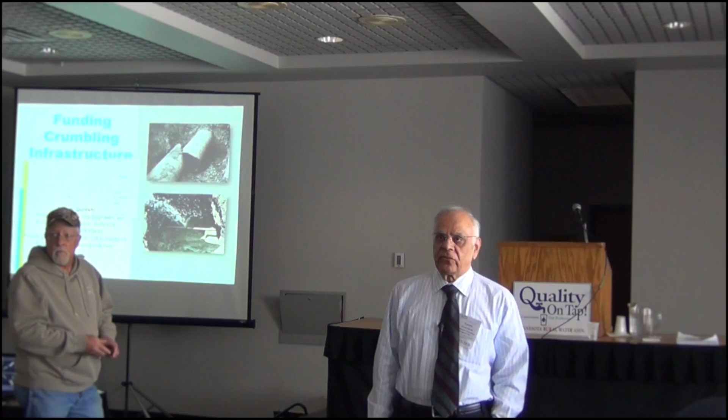Good morning. While I was driving up here, I was thinking about when I was a little boy and I would get a dollar from the tooth fairy every time I lost a tooth. A dollar? And if there was a hair fairy, I would now be a millionaire.

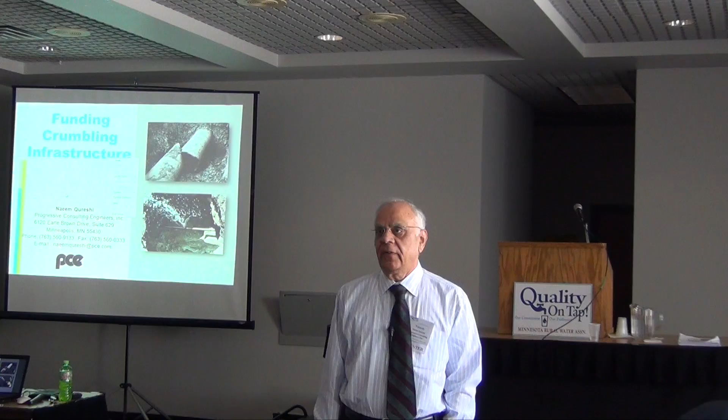The point I want to make is that as things age, they deteriorate. And as they deteriorate, we have to plan for its eventual replacement or repairs. My presentation today is going to focus on...

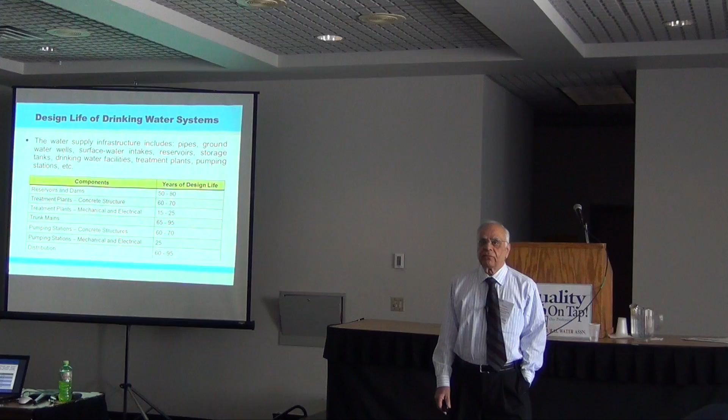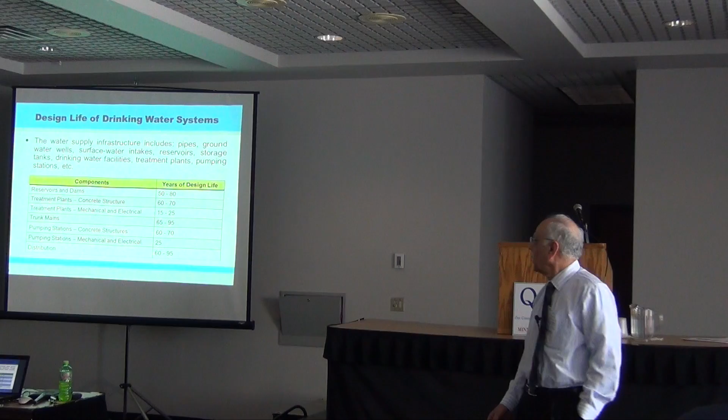First of all, design life of the various components of your water system are highlighted here. You have treatment plants, they're probably going to last about 60 to 70 years. Trunk mains, another 65 to 95 years, depending on the soil type. In some cases, if you have aggressive soils, that could be 65 years. If you have good soil, like sand, it could be a lot more. Pumping stations, if you have concrete structures, they last about 70 years. And the distribution system is 60 to 95 years.

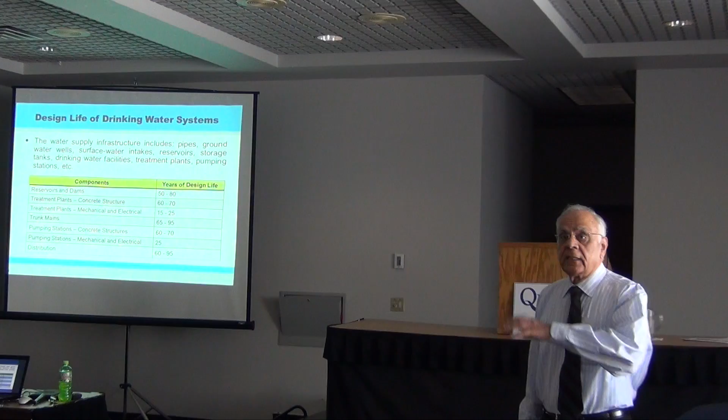So when you are looking at how much money you need, you have to keep in mind that you have to be able to fund these improvements as you go along.

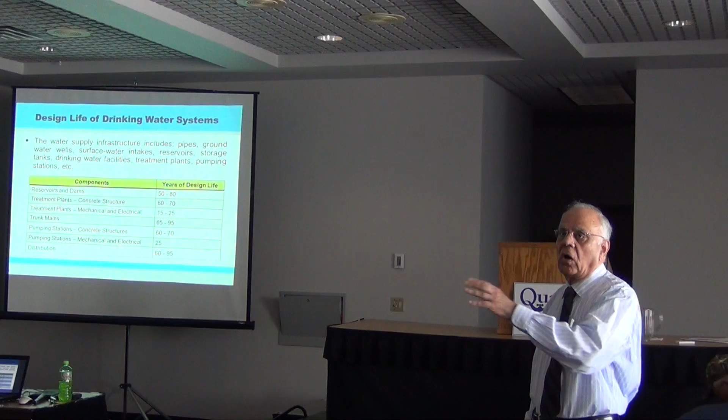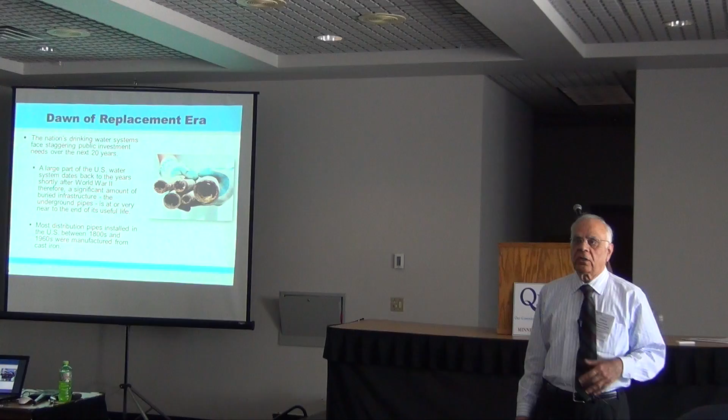Most of the drinking water infrastructure was constructed after World War II. This is a sample of some of the mains that have been dug up from various places. Most of your distribution system was actually constructed at the turn of the century, and the major installation occurred just after World War II, when a lot of our troops came back and started families, and expansion happened. There were hundreds and hundreds of miles of pipe laid for new housing.

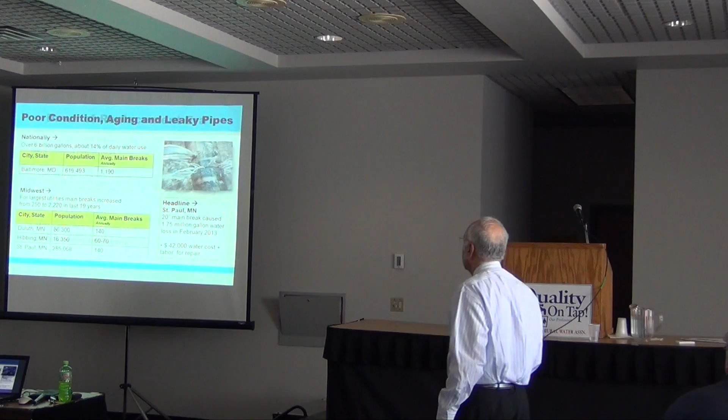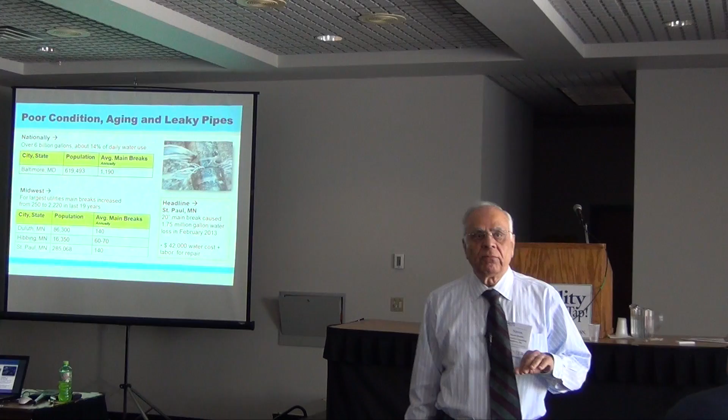What is the condition of our infrastructure? Nationally, I'll share some statistics with you. In Baltimore, they have 3 main breaks a day. In the Midwest area, look at what's happening in Duluth: 140 main breaks a year. A typical main break costs about $10,000.

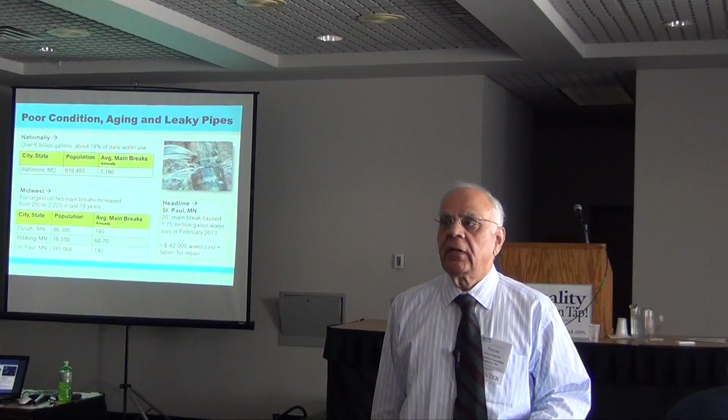By the time you dig it up, repair it, reconstruct the road, restore it, all of that kind of stuff - they are spending about $1.4 million trying to repair what they've got.

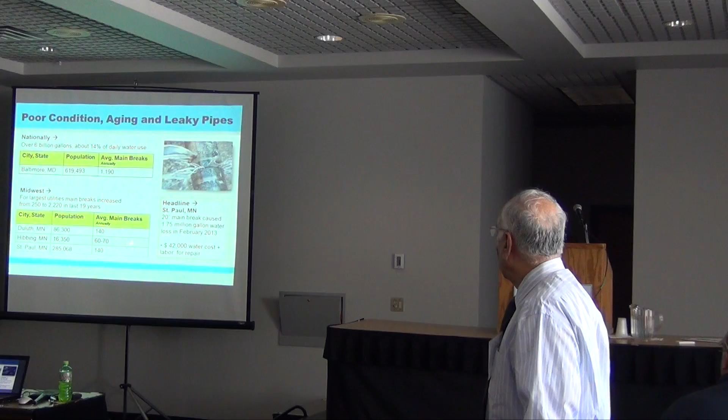Now, Hibbing spent about $600,000 to $700,000 just fixing their existing main breaks, and St. Paul has got 140. If you saw the papers in early February, you saw that there was a 20-inch water main that broke in St. Paul. They lost about 1.75 million gallons of water. The cost of that water alone was $42,000 - not considering the fact that they had to do this repair in an emergency, pay overtime to their people, and make repairs. They were lucky.

This water main break happened near downtown, and as you know, downtown kind of slopes towards the river. So when the main break happened, all the water, instead of going into people's basements and flooding things, actually went to the river. So they were saved in that way. Otherwise, they could have had hundreds of thousands of dollars in claims from property owners.

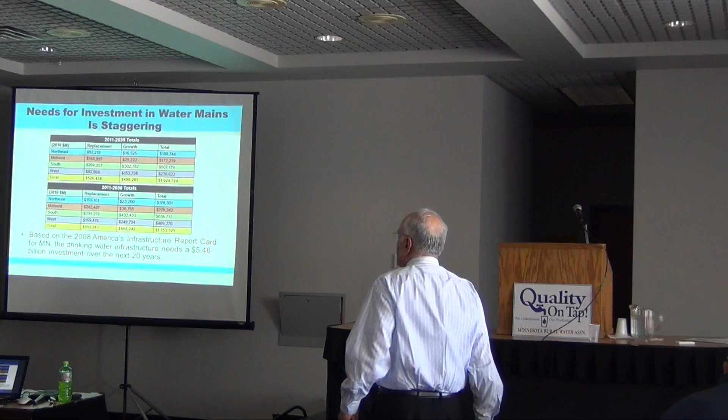A new study was done by the American Water Works Association, captioned 'Buried No Longer,' looking at the needs from 2011 to 2035. It's about $1.02 trillion, almost $1 trillion. If you look at the long term, from 2011 to 2050, it's about $1.75 trillion. Almost half of that is because of growth, and more than half is for replacing the existing infrastructure. So the needs are enormous.

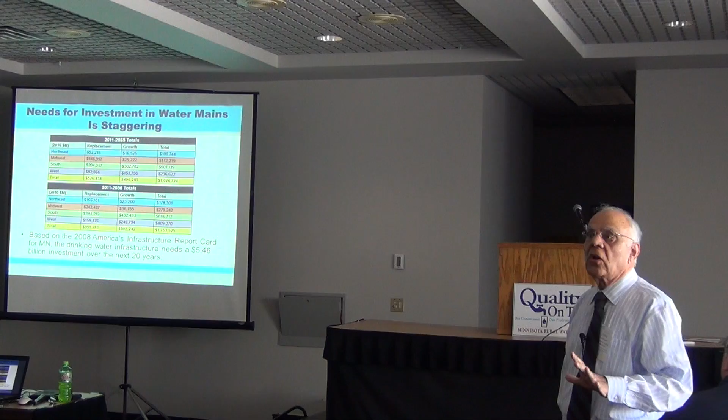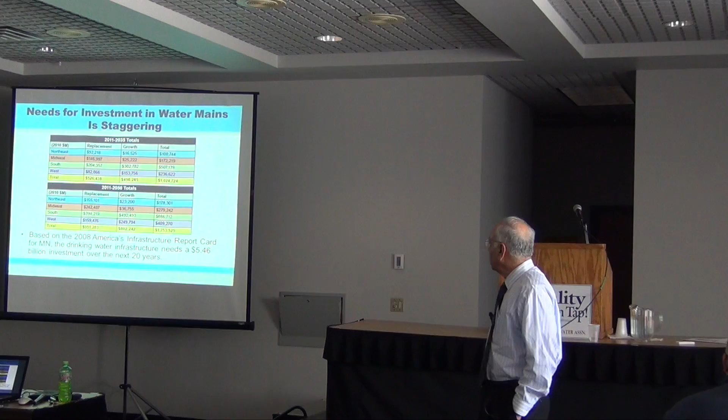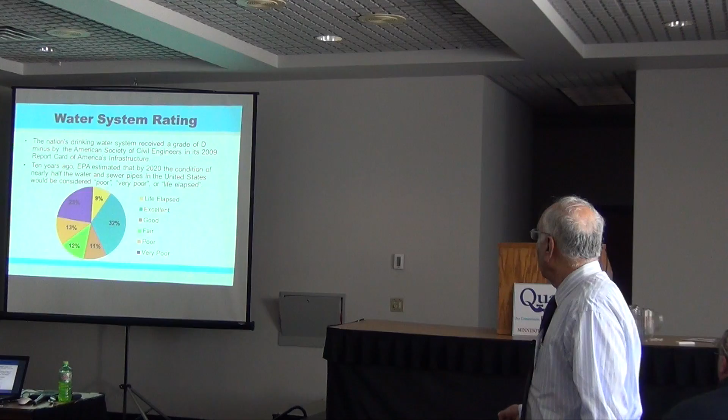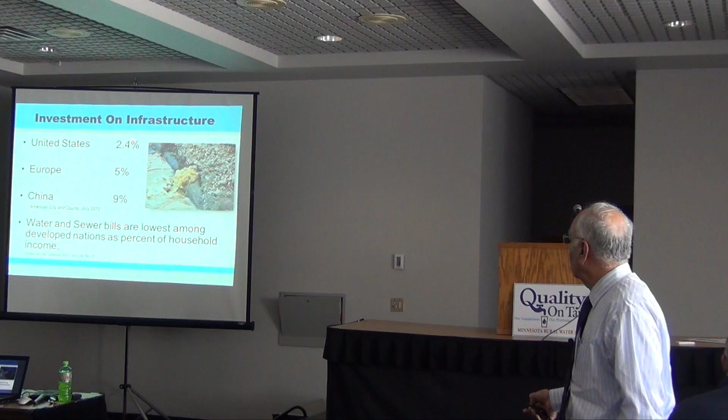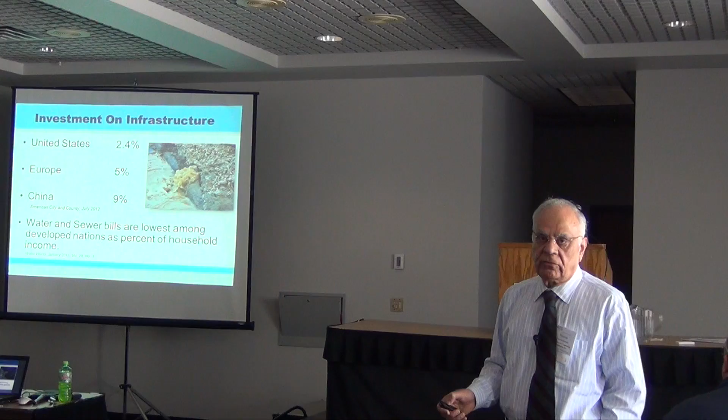So we have a big problem on our hand to be confronting. Now, what do we do on the international scale? We spend about 2.4% of our GDP on infrastructure replacement. Look at what other people are doing. Europe spends about double that, and China is spending 9%. And we have one of the lowest rates for water and wastewater in the entire developed

country. So we are not paying enough for our water and wastewater, and others are doing. Because we do not, although we can live without electricity, we can live without several other things, but we cannot live more than 6 days without water. But we have not been able to prioritize and say, yes, it is important.

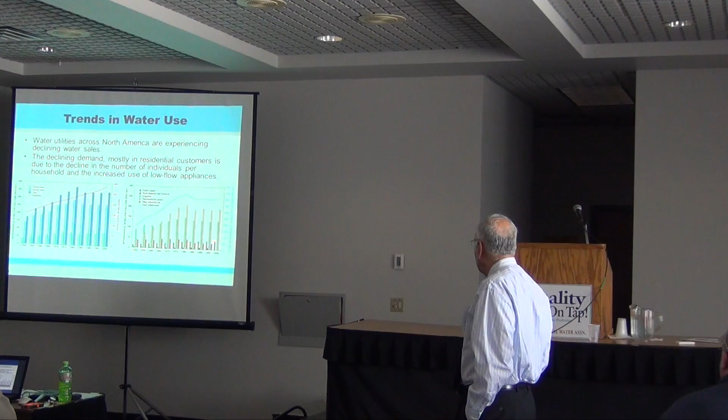And if you look at the water public supply, it's not very clear, but you can see that although this is the total that we use, the water supply is kind of decreasing also. This is the national trend.

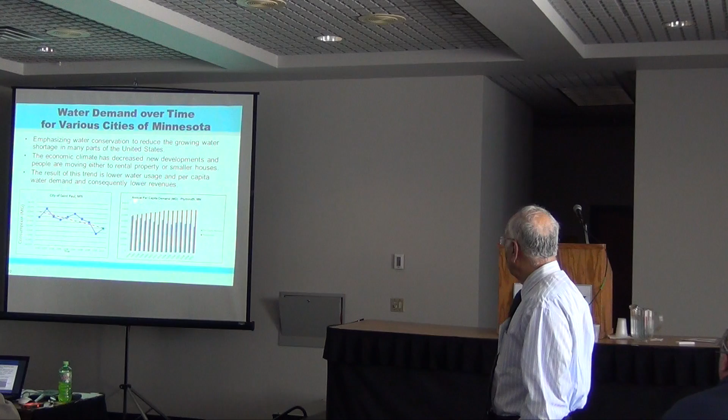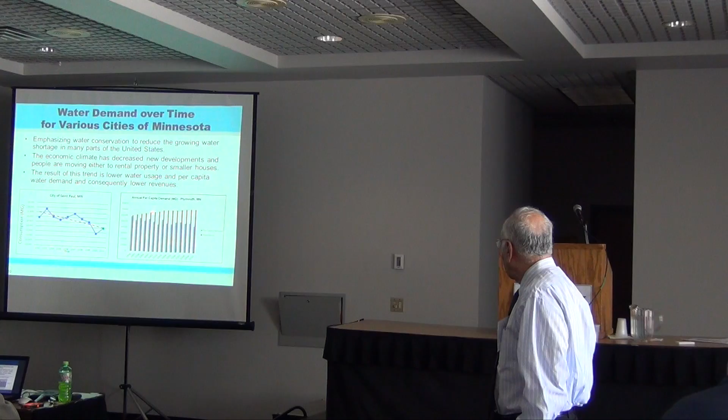What do we see locally? What do we see in Minnesota? This is a graph for St. Paul, and you can see that their demand is also decreasing. This is a graph for city of Plymouth, and this is the per capita use, and you can see that the per capita use is going down. There is an increase in demand, but that demand is primarily because of growth. The per capita demand is going down.

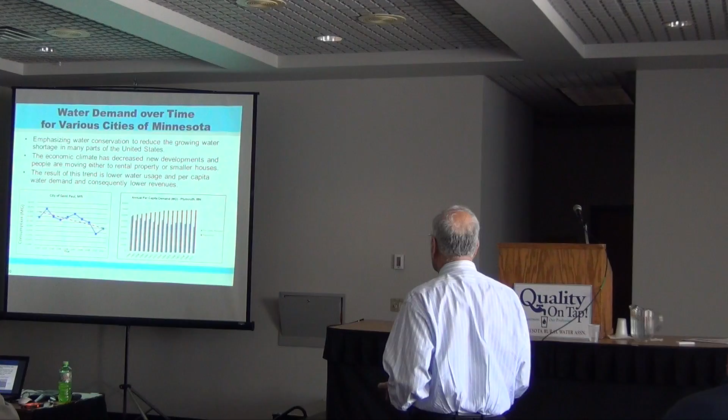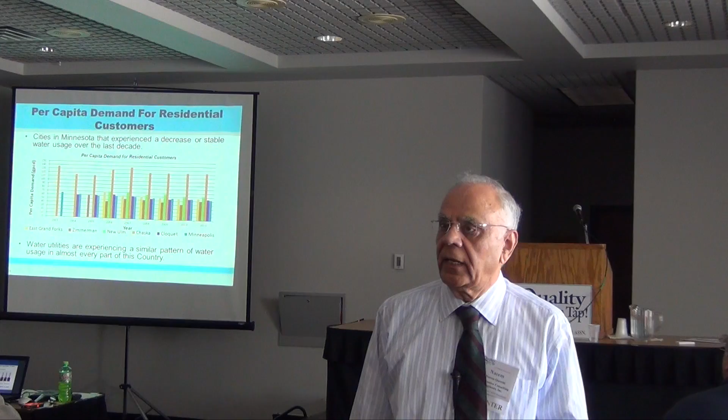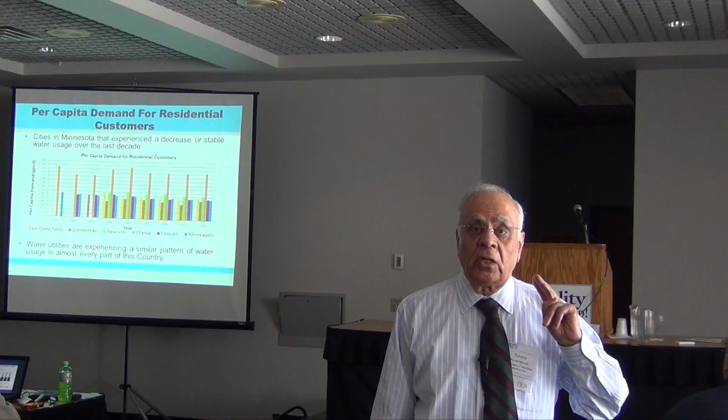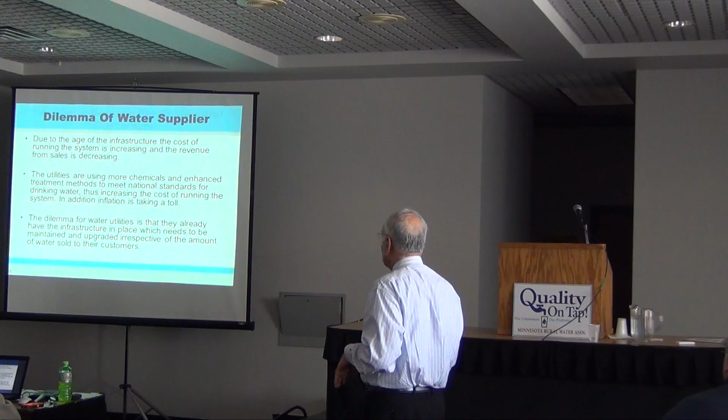And there's a study that was done and published in the American Journal for American Waterworks, and they said that there is a decrease of 0.5% a year throughout the country. Is that for conservation and rates? They said there are two reasons that's happening. One is that the size of the families is decreasing.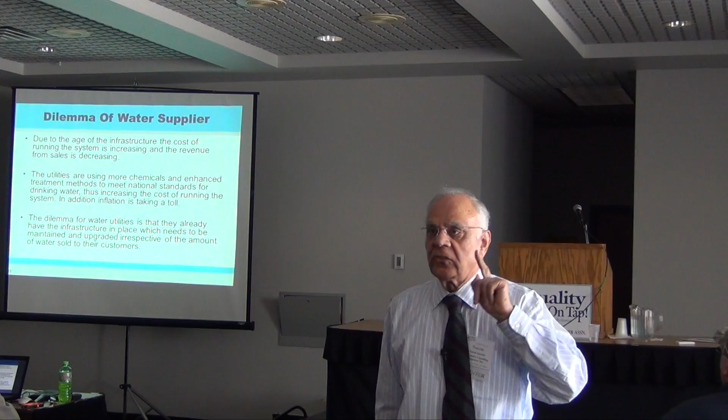The second reason is because people are installing more efficient fixtures. Now, if you remember, in 1992, the Congress passed a rule called the Energy Policy Act, which said that after 1996, you cannot manufacture fixtures like toilet fixtures that use more than 1.6 gallons per flush. And they also have standards for water faucets and things like that. If you look at it, before 1985, the standard was 3.5 gallons. Before 1980, it was 7 gallons. So you've gone from 7-gallon flushes to 1.6.

And now they have come up with better, more efficient fixtures which use only 1.28 gallons per flush. Initially, when they installed these new fixtures, they didn't work so well. You had to double flush sometimes. Now that has been taken care of. New designs are doing that. So nationally, it's 0.5%. Now you may say, well, 0.5% is not a big deal. But if you accumulate that over a period of, say, 5-7 years, you're looking at quite a significant drop.

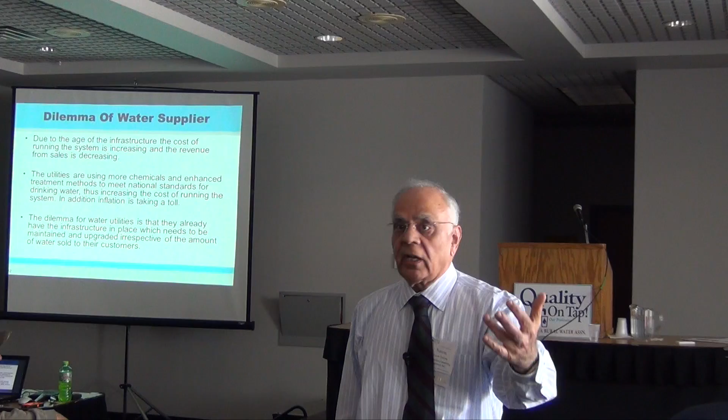One thing that's happening is all over the country, the water quality that we were used to has all been used up. Good quality water has been used up. Now they are using water that's kind of brackish or sometimes has other chemicals in it. So in order to treat that water, we're using much more chemicals.

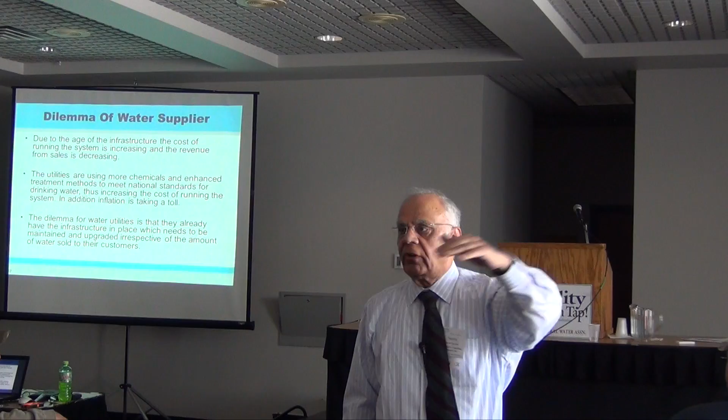Now, for example, the city of Hibbing, their population is decreasing. But they have infrastructure. What can they do? They can't shut down part of the city and say, well, we're not going to supply water to you. So you have a dilemma there. What do you do?

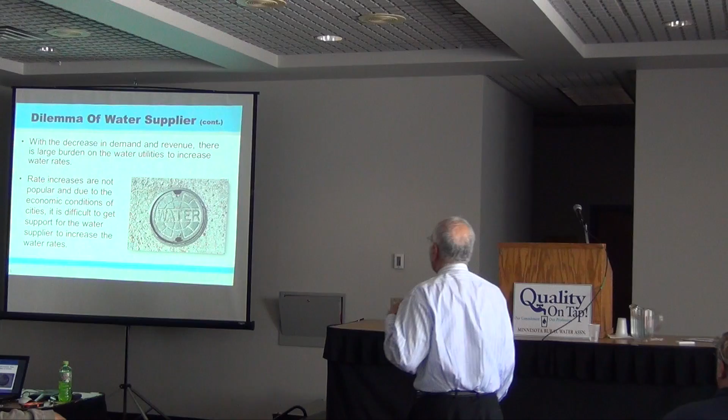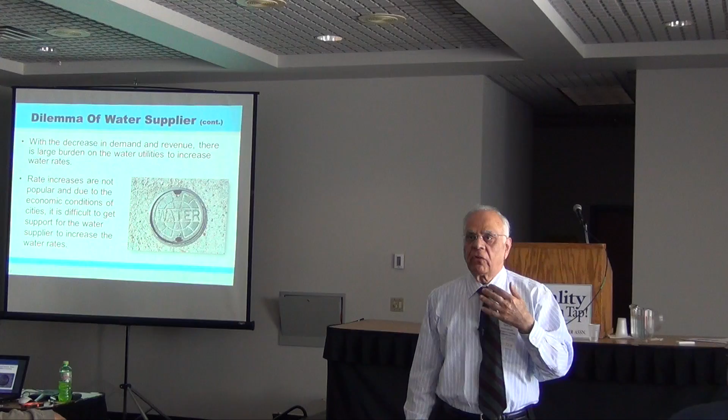Now, with the decreasing demand that you have, there is a push to increase rates. Most of the cities are looking for some help. And Congress is working on that. But the main revenue stream is going to be water rates. And it's not popular to increase water rates. Every politician thinks that raising water rates is suicidal. If they raise water rates, people are going to be upset and they may not vote for them.

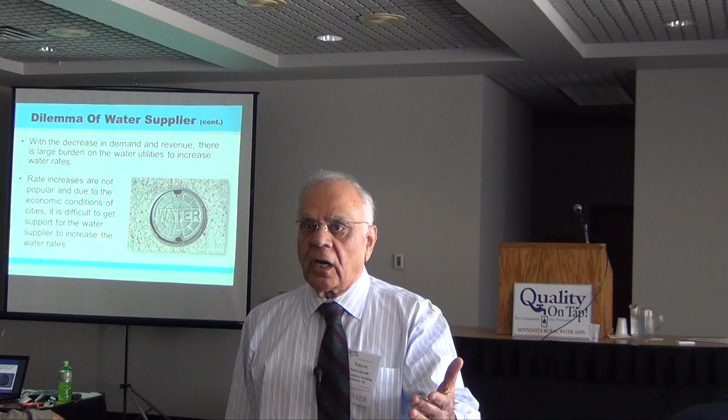I've done some 30-some rate studies. And when we have put together a good presentation to show the politician what the needs are, invariably they have agreed with my recommendation to increase rates.

Some of the things you can do internally is look at your asset management, try to develop some plans that would take care of maintenance as you go along. You can maintain an accurate inventory.

I've told you earlier this morning that there is a life of every project, an estimated life. Now start putting together a depreciation schedule that shows the politician, well, your system was worth $8 million in 2010. In 2013, it's only 7.5. So you can show them that you're not funding the infrastructure that you need to, and your assets are going down. Ultimately, if you keep that trend down, it will be catastrophic.

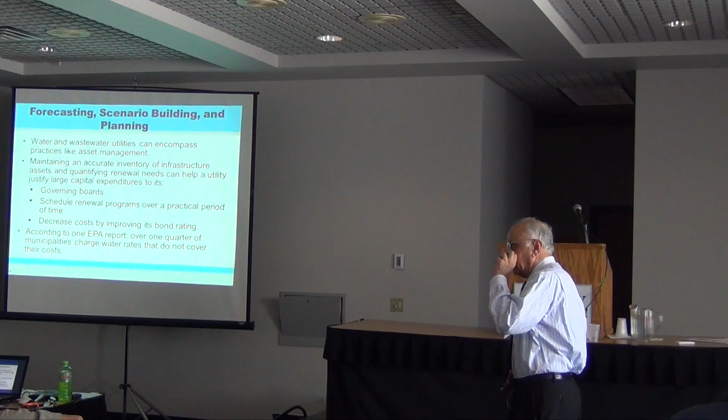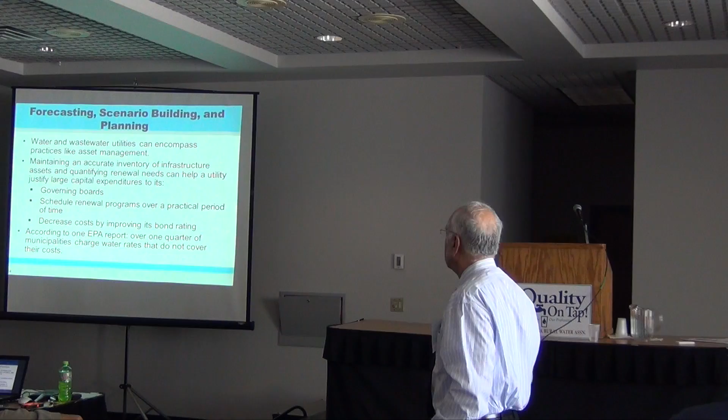You can look. There's a quarter of most utilities that do not fully fund the water rates. A quarter of municipalities don't charge enough water rates to cover the full cost of water. That's what EPA says.

Now, if you start raising rates, there is a sentiment out there: well, you're going to raise the rates on the elderly. You can have some special rates for them, right? There are times when you have to recover the full cost of expansion of the system, because when the city starts growing, all the cost involved in expanding the system should be recovered by those, and that should be a policy that the city should have.

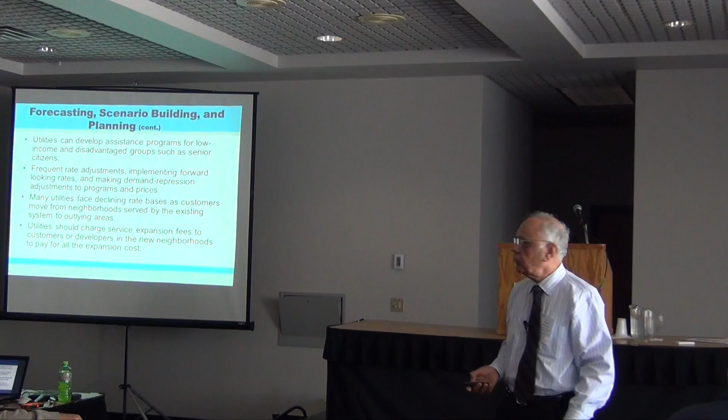You can develop assessing the condition of the water system. You can develop managerial capabilities. All of that is internal. And the most important thing you have is to communicate effectively with the people and with the boards. You can give them information about number of breaks, how much they cost to repair. You tell them the age of the structure and how much is left.

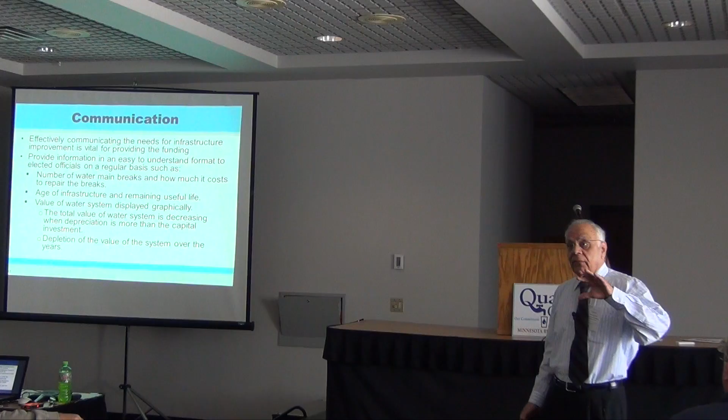Now, what Duluth did is they went ahead and did all of that. And the mayor made a presentation. They convinced the mayor that this is not the way to go, that we can't spend $1.4 million a year and keep patching the system. So now Duluth has a program in which they're going to be spending $4 million a year for replacing water mains. They're prioritizing those, but they're spending $4 million, and this is going to go on for as far as you can see.

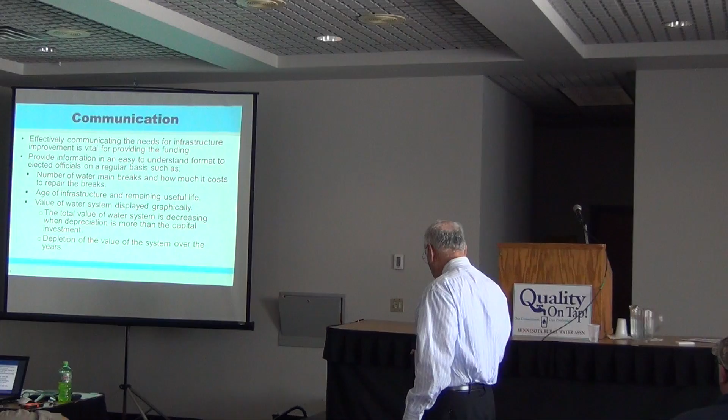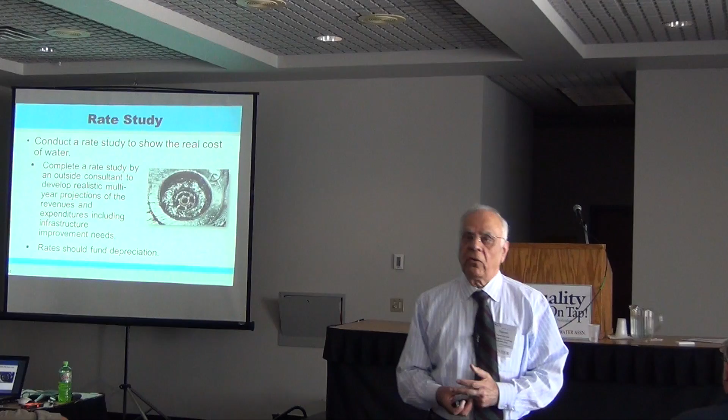And then you can also show them where you are with depreciation. Now, the other thing you can do is you can conduct a rate study, and typically what you do is you have to have somebody outside to do it, because somebody that comes with a briefcase has more credibility. I don't know why, but it does.

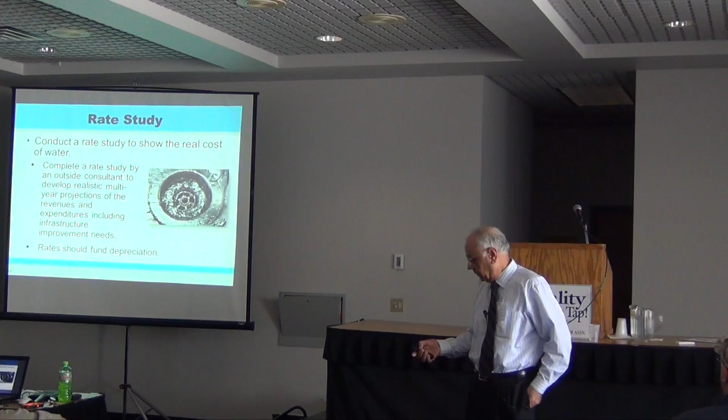And then you can develop some rates that fund depreciation. Rates should fund the full depreciation. The other thing you can do is you can set up a citizen advisory committee so that this advisory committee can become your advocate. Now, most of us, what we do is we do our job, we go home, and we're happy. We are not good communicators. We can set up a rate committee, and that committee can then become your advocate for rate increases.

You have to treat your community as partners. It's not that you do your job and you don't consider them as partners. And then you have to meet with the stakeholders and find out, have them on board for what you're doing.

You can set up conferences, you can give some information to the media. Now we are all media shy, but this is important, to tell them, give information, and I'll give you an example of what Brooklyn Park has been doing and how successful they have been in getting money for what they want to do.

This is an example of what Brooklyn Park has done. They have a long-term strategy map developed. They show in a very distinct manner where the improvements are going to be, when they're going to be doing it, and how much. You can't really see it, but it has all the information.

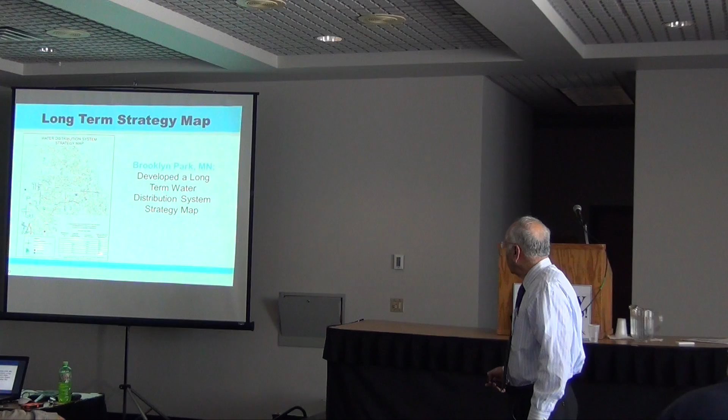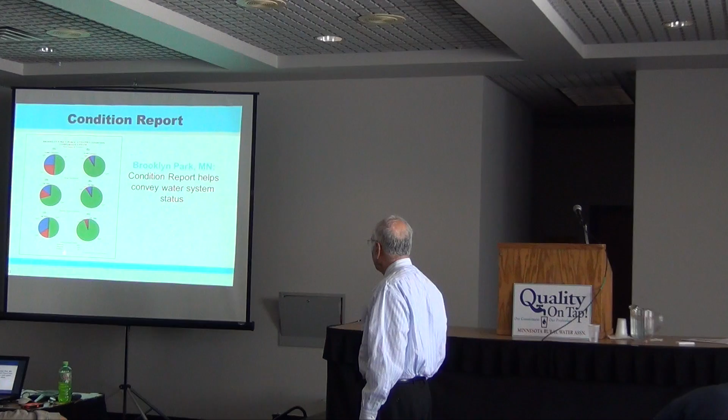They also have what is called a condition assessment. They develop condition assessment, shown in this report. They talk about where the system was in 1991. They had about 15,000 customers; now they have almost 22,000. They have 190 miles of main, and now they have a lot more. He also developed a rating system in which he shows how much of the system is all right, adequate, marginal, and then the last one is problem. So he rates the entire system into various categories so the politician can see where the needs are.

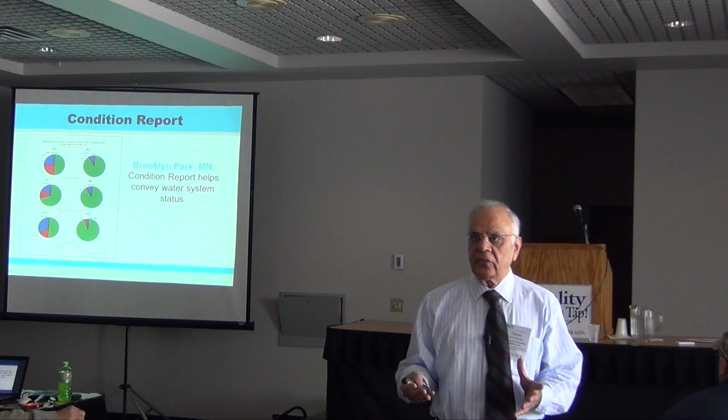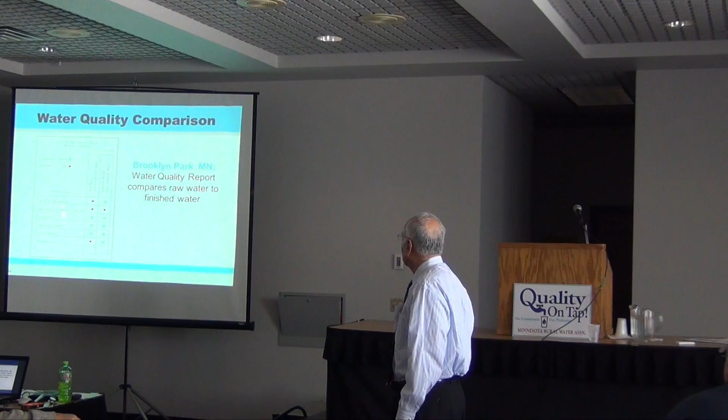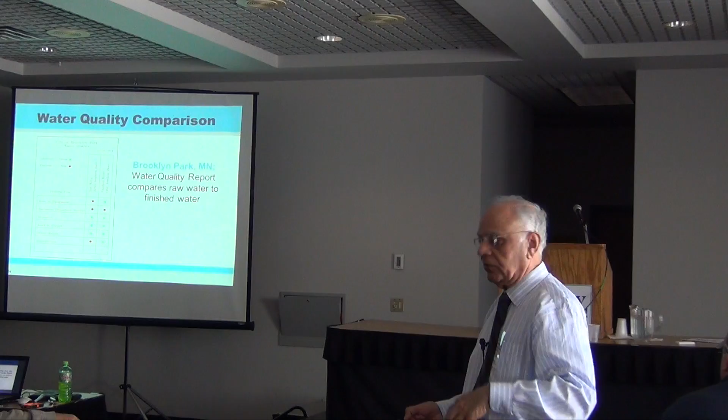The city also has a very clear comparison of water quality and some of the issues that are there. John Thiel is the person who authorized this. He shows the raw water versus finished water quality, hardness, organic content - all of those things are rated. He asks, is that adequate? Anybody can look at this and say, yeah, this is where the problem is.

Now, how many of you want more staff members to do this in your department? Raise your hands. No? Everybody is okay with what they have.

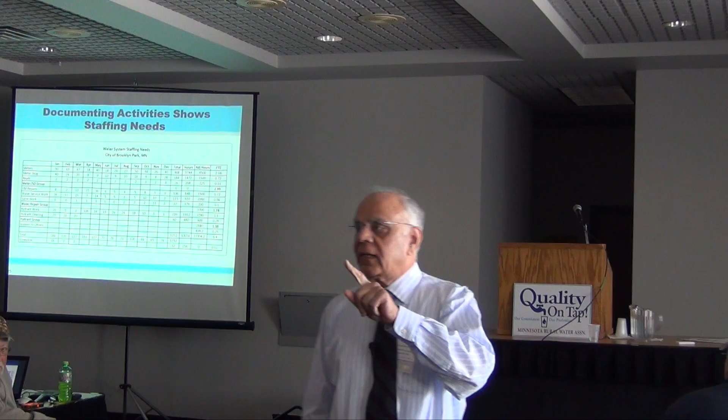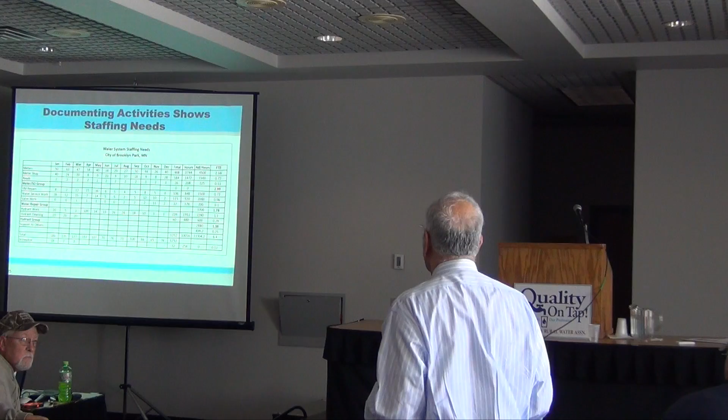When I go and meet people, they say, well, I'm really stressed, I've got a lot of work to do, and I'm overworked. That's the comment I commonly hear. What Brooklyn Park does is they actually track the activities over the year - how many meters and things like that - and they say, okay, based on the hours needed, we have to have 6.4 FTE in that department.

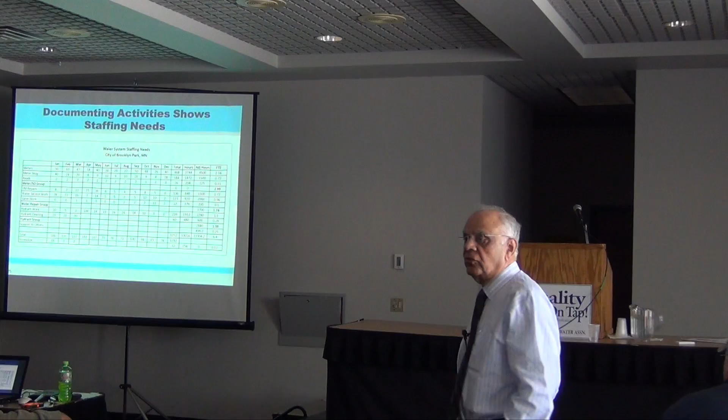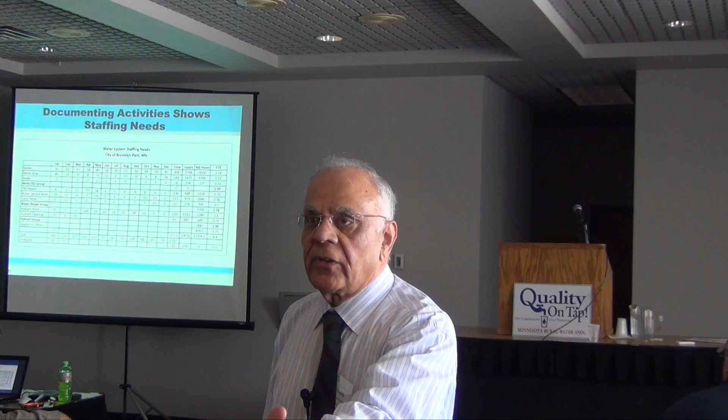When you go to a politician, they say, we want to cut cost. They present this information: which of the services don't you want? I can cut 2 people, but these are the services we are providing - which other services don't you want? It's very difficult for the politicians to say cut this service or that service.

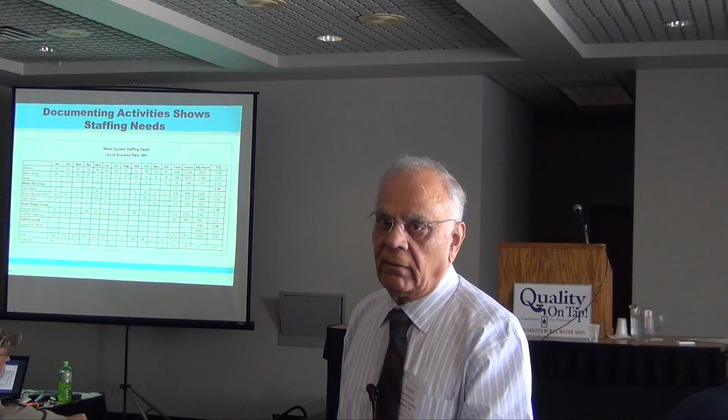They make a blanket statement: we want you to be more efficient. Okay, we can be more efficient, we can do less work, cut people. But which of the services do you tell us you don't want? Most of them say, no, we want all the services, but we want you to cut the cost. Well, that's not going to happen because they can only work so many hours.

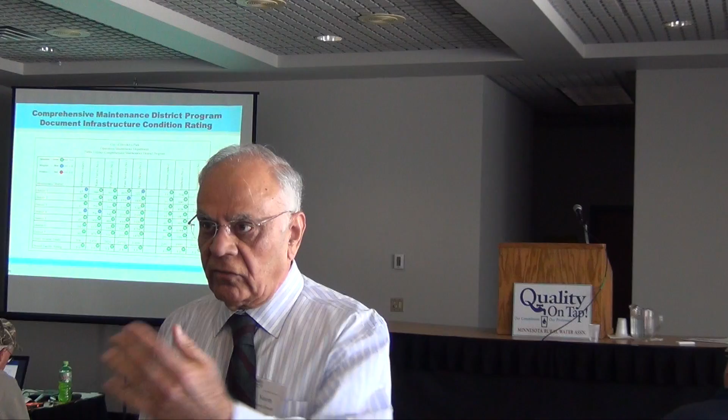What he does is he communicates that every 6 months to the council. He says, I want to give you an update on where you are at with the water system and the sewer system. This is what they get, so they can look at it and see what the condition of the system is.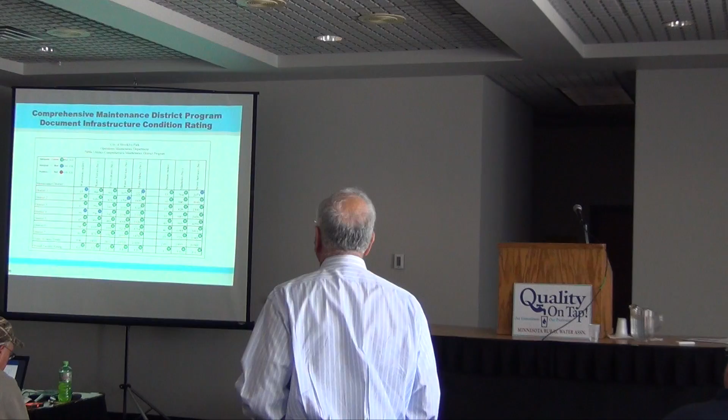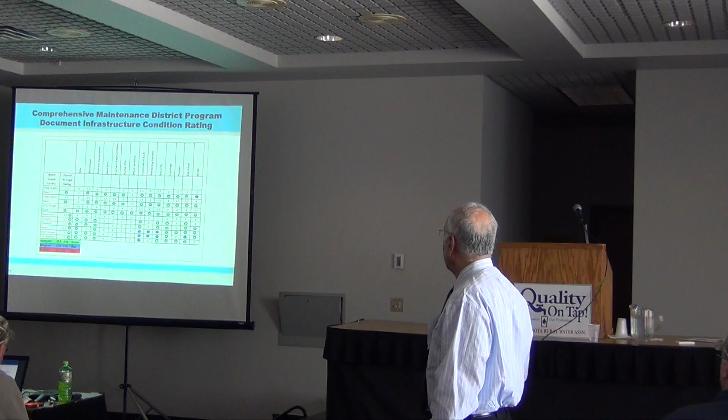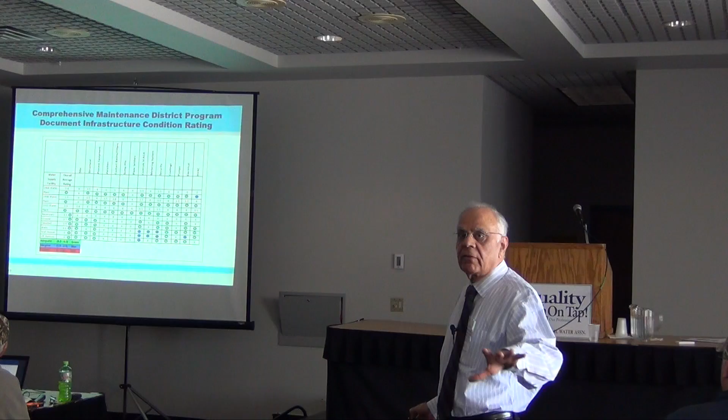This is what they do for the rating system. He has 3 to 4 is adequate, marginal is 1.9 to 2.9, and problem is below that. Then he rates every element: structure, process equipment, aeration, contact - this is part of the water treatment plant now. He also rates the SCADA system, metering system, all of that. So the council is constantly aware of where the needs are, and nothing is a surprise for them when they're looking at all of this.

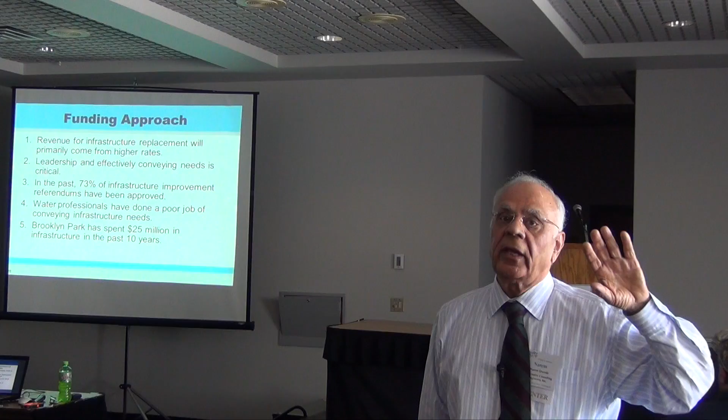We have to keep in mind that most of the revenue is going to come from rates. There are some programs out there you can tap, like PFA and others, but primarily all these improvements are going to be coming from rates. So rates are going to go up - that's the only way they're going to be. Based on the literature I've read, they are going up at a rate of about 4.5% to 5% a year throughout the country.

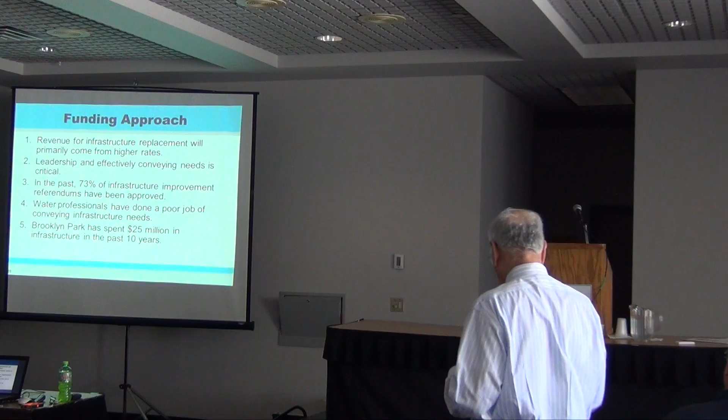Now, leadership - if you convey the needs in a clear, concise manner to the politicians and to everybody else, you would get the money. And if you look at what is happening, 73% of referendums for improvement were passed when there was leadership, and they provided the information clearly and worked on a program to develop support for increasing water rates. 73% - that's a pretty good success ratio.

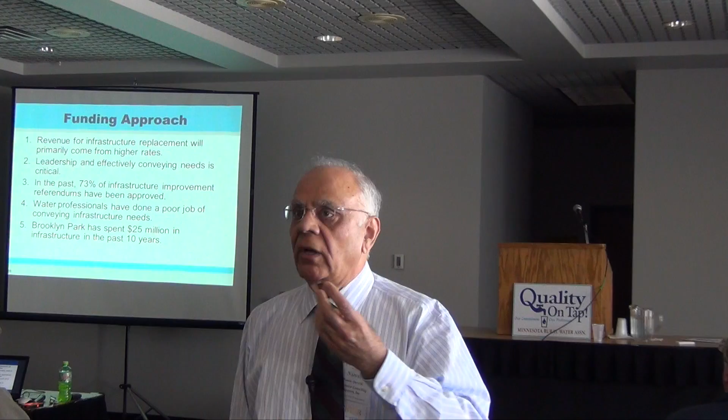As I mentioned earlier, water professionals are not very good at communicating, and I include myself in that. We do our work and we go home and we are happy. We need to step up further and go one step further and start communicating all of that. The only time they hear from you is when there's a water main break, there's some failure on treatment, or there's some other issue that is a problem. They never hear from you otherwise.

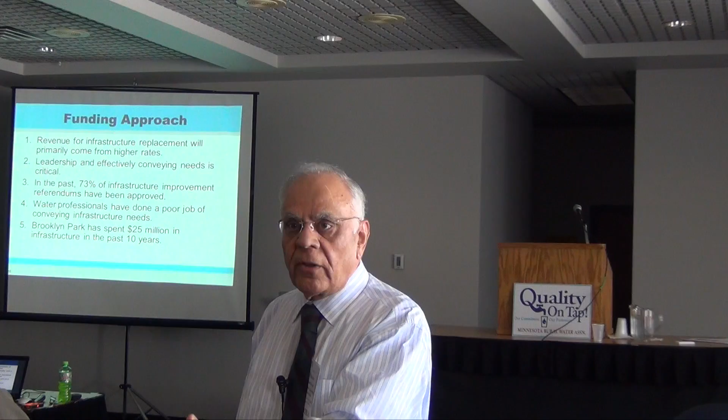There's never an article in the paper wherein they say, well, Gary Schreifel did a good job, or this person did a good job. They're always waiting for some failure to occur. If you look at the February issue, I don't remember the date, but the article in the Minneapolis Star Tribune was front page when they had a 20-inch main break. But there was no news for several years or months saying they are supplying good quality water.

St. Paul has done a very good job of taking care of taste and odor in their water. If you have any experience there, you probably noticed that. But there's nothing in the news about that.

Brooklyn Park has spent almost $25 million in the last 10 years because they were able to communicate the need and build support with the community and the council, and so they were able to do all of that.

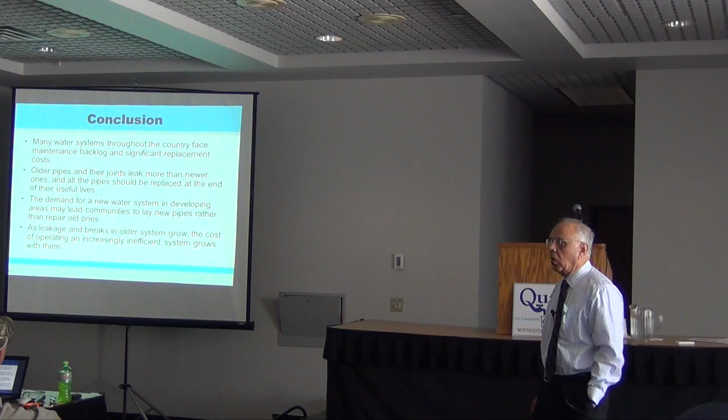The conclusion is that you are not alone. There are many water systems that face a backlog in their maintenance. Older pipes are going to leak more and more as you move forward, as the system ages.

And you are going to be asked to lay new pipe in areas that are being developed to supply services like expansions of their water system, and that has to be funded by the people that are needing the service. That should be very clear.

As leakage and breakdowns occur, the cost of operating the system is going to increase. For example, we had that one water main break in St. Paul that cost them over $60,000. As more and more of those things happen, the cost of maintaining the system is going to keep growing.

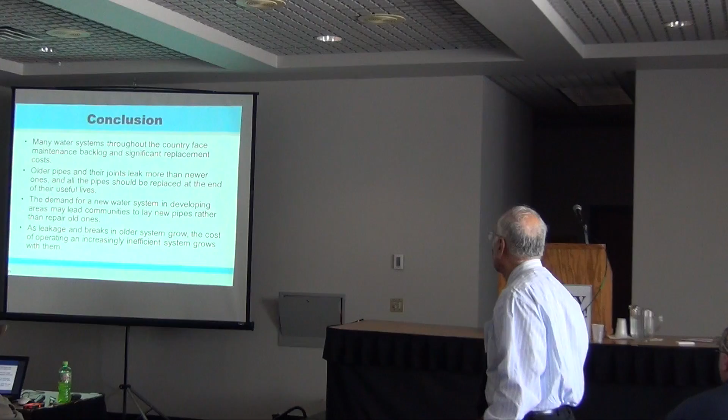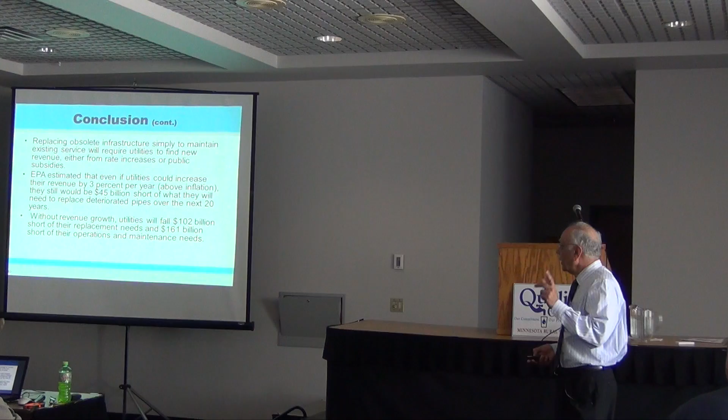We will need rate increases. EPA estimated that if utilities were to increase their revenue 3% a year above inflation, they will still need $45 billion in the next 20 years to replace the water infrastructure. So the push is going to be to increase water rates. And if you don't increase any growth, your shortfall is going to increase dramatically.

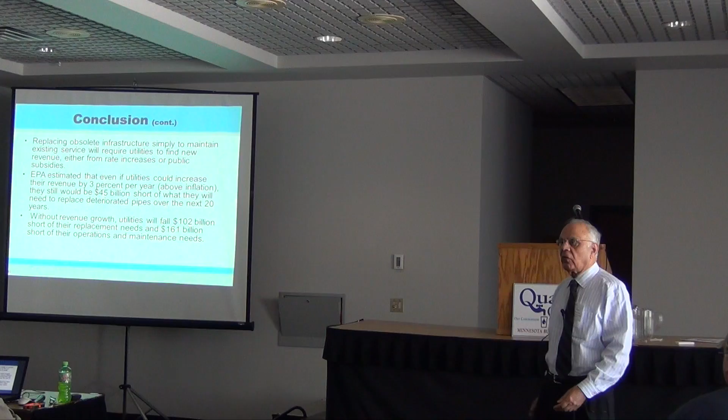And with that, I'll open up for questions.

Per capita gallons per day per capita - is that based on what you totally pumped divided into your population, or just the gallons that you sold to your customers divided into the population? And then, if I call you or whatever, could I get a list of everybody you've got so we can see if we're in compliance? Because I do them both already right now.

Any other questions for Naeem? I've got a mic here. Here we go. State your name and where you're from.

In the St. Paul incident that happened that we all saw on TV, I was wondering - it was a contractor doing some construction work that fell through and damaged the water line. I was wondering who's responsible for that cost.